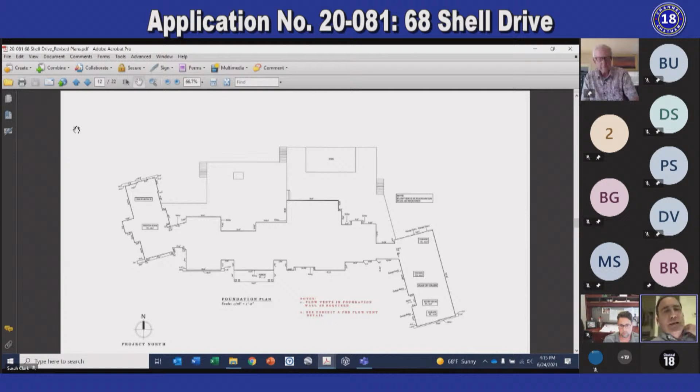So from a straight planning standpoint, and my background is both in architecture and urban design, I really looked at this a little bit like an urban design project. It's really built around two courtyards, the south courtyard and the north courtyard. What I tried to do is stretch the program of the house out east to west, so that most rooms will have 2 or 3 exposures. There's a lot of talk lately about LEED design and green design, but back when I started in architecture in the 80s, we used to just call it smart design - creating rooms that have good circulation, adequate overhangs for summer shading, and also light penetration throughout the house.

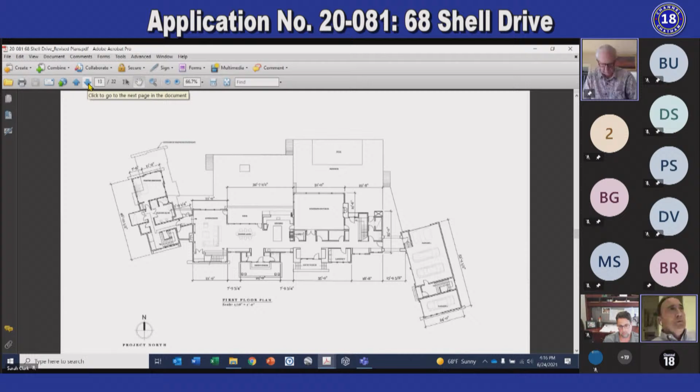So the design cues for the project actually came from the site itself, as well as the history of Chatham and the history of New England architecture. Rather than creating what I would simply call an estate home, the idea was to think about this house much in the way that we see New England houses are built. New England houses, as you know, are built - you have the big house, which is the primary homestead, and it grows over time. You may have heard of the book called Big House, Little House, Back House, Barn, about how buildings grow over time to accommodate the family.

So in a lot of ways, we've spread this house out, made it look like it had been built over time, looking to the houses of Chatham and the existing houses, house and barns that were there, using similar pitched roofs, the ideas of what's called saddlebags, which are side rooms off of the main form.

But I think one of the things that makes this house really play into a lot of what we see in Chatham is that the house really isn't 2 stories - it's really a story and a half. What I mean by that is we're tucking that second level into the roof, so you don't have a full height wall on the exterior generally. Light, air, and mass is gained by building out dormers that pop up, or incorporating space into the gable ends of the building.

With that, I just wanted to say there are certain other challenges we have, because of course we have to provide flood vents in accordance with all state and local regulations. So it was important that we had all the mechanicals above that floodplain - obviously that precludes any basement. The idea of tucking those rooms in, we're actually below the necessary 30-foot height by a few inches.

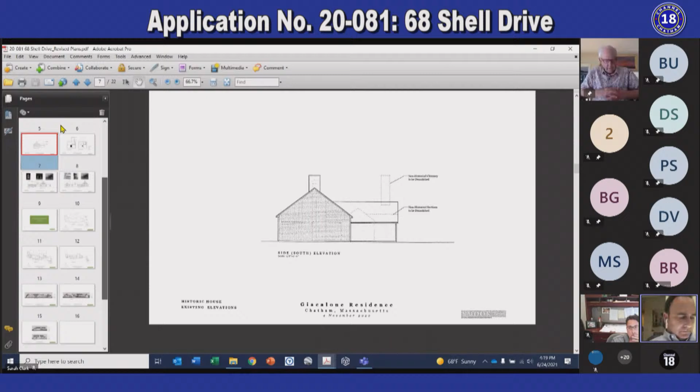Okay, Mr. Riley? Mr. Riley? I think Mr. Riley has disappeared. I'm here. Oh, good. All right. Yeah, you're lucky, I can't get my camera to turn on, but I do have the microphone.

Dave Clark is also in the meeting if you have any questions regarding the engineering. I guess the points that Clay has made are legitimate.

I think it's important to understand the neighborhood where this house is being built. As you know, and justly so, the board is concerned with the visual impact changing structures would have on the neighborhood. So I want to point out a couple of things.

When you're driving down Shell Drive to get to the property, because of the mature trees on the property and on adjacent properties, the only portion of the existing structure that's visible is the main section of the antique house. I don't know if any of you were there today or recently, but I certainly observed that.

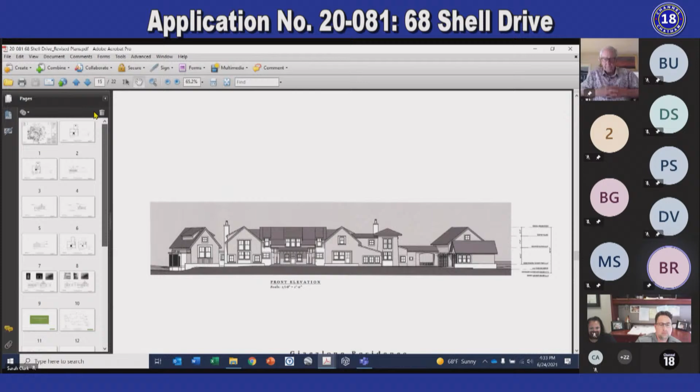If you look at the site plan, the current elevation is 10, and it's going to go up over 11, up to 11. And then Blue Flags Design did a plan that's going to put substantial plantings along that—not trees, because we don't want to block the view either way, but there will be planting. So in terms of the real visual from the water, it will be less than is currently shown.

There. Compatibility of the proposed use: it's a single-family house, and all the other rather large homes in the neighborhood are single-family homes. We are putting in a new septic system, which would be an improvement over the existing system.

And Dave Clark can address that if you want questions about that. We actually believe there'll be an improvement of traffic flow and safety, because with the driveway above the flood elevation, if there is a flood, both the owners of the property and any emergency vehicles would be able to continue to access the property despite the flood waters.

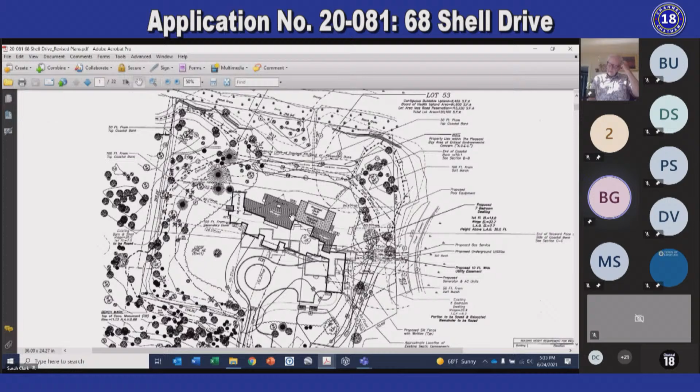Dave Clark. I am here. Go ahead, Dave. So the buildable upland, this is an unusual situation, the house is not even in the buildable upland. There's two sections of buildable upland: one towards the water to the left, and another section to the right, along the right property line. Because those two areas are not contiguous, we only counted the left side as the buildable upland of the lot, being 8,000 square feet. So the existing house, the proposed house, the location of the relocated portion of the saved home, none of those are within the buildable upland. Correct. Okay.

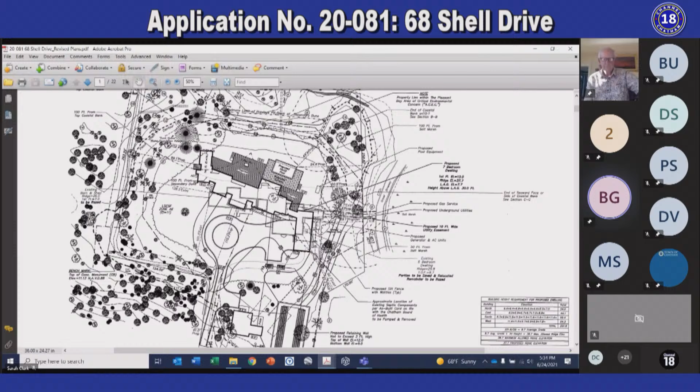Yeah, I also had the same concern that Dennis brought up and Paul about the driveway. I think we've pretty much discussed that, but have you perked that septic area next to where the building is being relocated, just out of curiosity? Have not yet. No, but there was a septic upgrade done there in the last 20 years, and I looked at those soil test results, and there's adequate soils. We will be required to do additional test holes when the time comes to permit the septic system. That was more of curiosity. That's all I had for now, Dave. Thanks. Okay.

Okay, so now we'll go through and list for Mr. Riley or anybody the concerns you might or might not have with this project. Let's start with Dave Veach again. So it's a very different question than what we had before. Yes, it is.

I'm very much in favor of saving the old portion of the house, and we've gotten a lot of feedback on that, and I agree with all of those writers. However, I have a number of concerns with this proposal. I've had some time to look around at things, knowing no decision we make sets a precedent, et cetera, but just looking at things we've approved or not approved in the Conservancy District, I honestly can't find anything that's asking as much of us zoning-wise as this proposal. It really stands out.

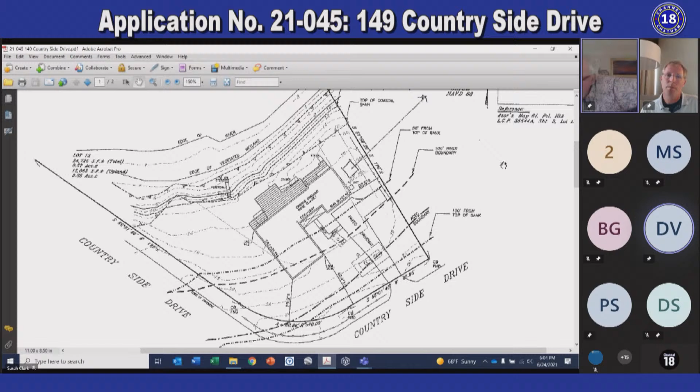So this requires a variance because it's being suggested to be placed in the conservancy. I'm not sure — I know we're seeking a variance, but I'm not clear why. Well, it's within the 50-foot setback of the Coastal Conservancy District. Yes, so it's a new nonconformity, and that's what's going on. Okay, all right, thanks. I don't have any other questions.

So we do meet the building requirements for setbacks. We have to be 9 feet from the property line. So as far as the building permit, I think we're okay. Okay, Paul, do you have any questions? No, I have no questions.

Okay, I don't either. So a motion, please, Paul. Yes, this is Paul Semple. I'll move to close the hearing and move into deliberations.

Dave Veach seconds. Okay, we need to vote on that. Dave Veach votes yes. Paul Semple votes yes. Dave Thompson, yes. Dennis Sullivan votes yes. And I vote yes.

Okay, deliberations, let's start with Megan. I do not have too much to say, except that I think that having to not park in your garage is kind of a hardship. I am not voting on this, but if I were, I would vote yes.

Bill? Yeah, you can see that the options are clearly limited, and while I know it is inside of the Coastal Conservancy setback area, putting it anywhere else outside of it on this property I wouldn't do. So I think I would be inclined to vote for it if I were voting.

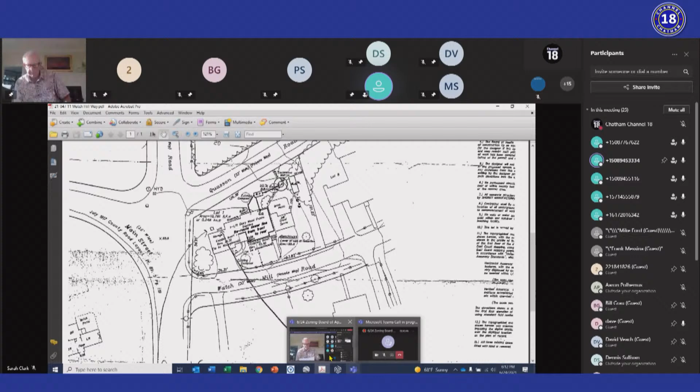The issue, as you know, is the noise mentioned in the letter. The existing air conditioning units actually will run far more frequently than the generator. I recall a former member of the board saying that with generator requests, if you've got generators, you've got problems more than noise, if the generator is necessary. So the issue is whether installation of one additional exterior mechanical appliance system, a generator, would be substantially more detrimental to the neighborhood. I think in this case you can find that it will not be at all detrimental, given its location and proximity to the existing compressors in a location which is both fenced and shielded. Happy to answer any questions.

Okay, thank you very much. Is there anyone in the audience who would like to speak in favor of this application? If so, please indicate on the screen now so Sarah can recognize you. I don't see anyone that wishes to speak in favor of this application. I'll read the correspondence, which consists of a statement from Nicole Smith, our conservation agent. She writes, 'No conservation approval needed.' End of correspondence. Is there anyone in the audience who would like to speak either against this or has a specific question? If so, please indicate on the screen now so Sarah can recognize you.

I see no one who wishes to speak in opposition or has a specific question. I'll generally ask the board members, does anybody have a question? If so, speak up. Well, I think the silence speaks for itself.

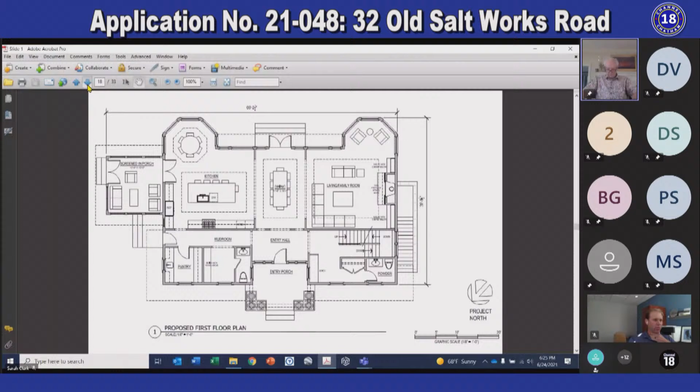And then next slide, we do have a floor plan, as you can see. First floor, and then the next slide will be the second floor. Thank you, and then keep rolling from there, please, Sarah. Just the basement. And then we do have a garage right here. Go to the next slide.

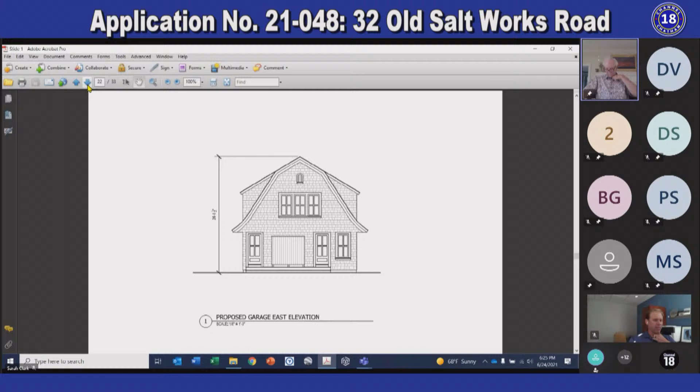And the next slide. So this garage does have a bit of finished space over top of it, but rather a compact 2-car garage with some finished space over top. And then you can see a little changing area on the side, on the floor plan on the first floor, and then this is the second floor space of the garage.

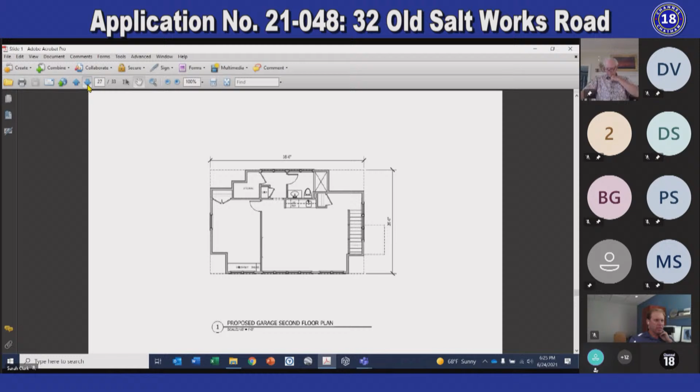And then we just did a rendering. The renderings, I think, help a lot rather than just looking at the 2D elevation. So we rendered the design for you all, so you can see it. This is on the driveway side, so not visible, but wanted to share with you what the structure will really look like.

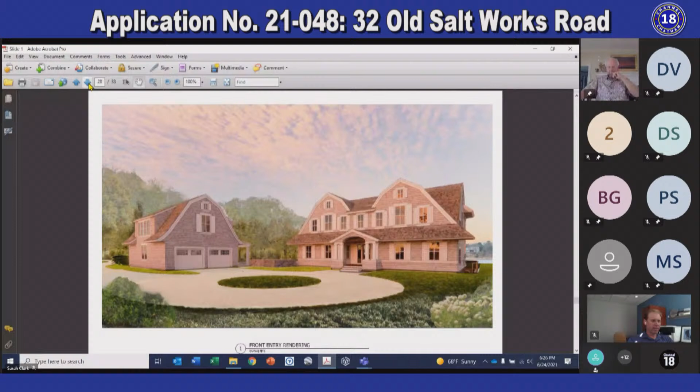And then next slide, just the existing floor plan, and then back to the site plan. Oh, you can go back, Sarah. You just had these, if there are any. Thank you, you can go back to the site plan if you would please. We can just leave it there. Yeah, that would be great, Mr. Ford.

Excellent, and happy to answer any questions along the way as well. Thank you, Mr. Ford. Mr. Chairman, why don't I run through the criteria? Please do. So, adequacy of size of the site.

As I indicated, the site is over 44,000 square feet, 44,899. The buildable area is over 40,000 square feet, 40,944. So it is a conforming lot from an area standpoint, non-conforming in that it has simply 60 feet of frontage.

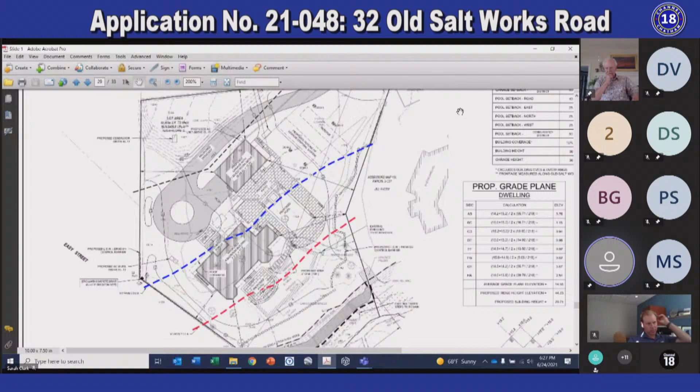The proposed dwelling will now be located out of the Conservancy District. It meets all setbacks—side, rear, all abutter, obviously front yard—as does the accessory structure, which has the changing area for the pool as well as a garage and a room above. The two structures have a total building coverage of 3,300 square feet, which is 8% of the lot. 10% is allowed under the zoning bylaw. So I think you can make a finding that the site is adequate for the proposed project.

Compatibility, the size of the proposed structure with neighboring properties. I think as Aaron took you along the water, which is where this is visible from, as opposed to Old Salt Works Road, where it's not visible, as it's in the lot. It will be compatible. It will be a little smaller than some of those houses along the water. Some of them are quite large, but we think it fits in fairly nicely and is under the lot coverage requirements, and as I said, meets all dimensional requirements of the bylaw.

Extent of the proposed increase in non-conforming nature: we eliminate all of the nonconformities of the present structure. I should mention, there is one other nonconformity on the site, Mr. Chairman. It's down near the beach, on the right-hand side of the lot. It's an old pillbox, a concrete structure. It is a remnant of the Naval Air Station that was there. This area of the property actually had a large blimp hangar on it, and that pillbox was accessory to that.

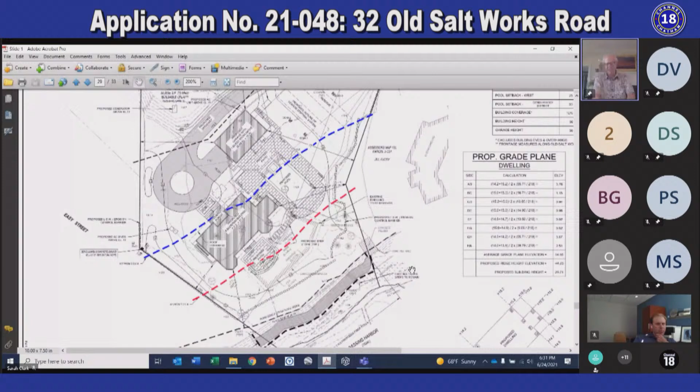Is there anyone in the audience who would like to speak in favor of this application? If so, please indicate on the screen now so that Sarah can recognize you. I do not see anyone that wishes to speak in favor of this application.

Okay, then I'll read the correspondence first. This is from Nicole Smith, conservation agent. She writes: 32 Old Salt Works was heard at yesterday's meeting and many questions were answered. We are waiting for land management documents, but I believe the project as presented will be approved with conditions, and any changes would not be zoning related.

Then we have a memo from Judith Giorgio, Board of Health. She writes on 6/21: I've reviewed the plan for construction of a new dwelling. The proposed dwelling will add sewage flow to the existing property above what is allowed by the Board of Health nitrogen loading regulation. This will require approval by the Board of Health for the installation of an alternate septic system in order to construct a 4-bedroom dwelling and a 1-bedroom guest house.

Then we have a note from John Avery, whose address is 34 Old Salt Works. On June 21 he writes: thank you for sending us notice of the public hearing. As owners of the property at 34 Old Salt Works Road, we are writing to express our support of a special permit being issued to enable them to move forward with construction of their new home. We have reviewed the plans of the proposed home and believe it will fit nicely in our neighborhood while preserving the integrity of the shore front. We hope the Zoning Board of Appeals will approve the requested special permit.

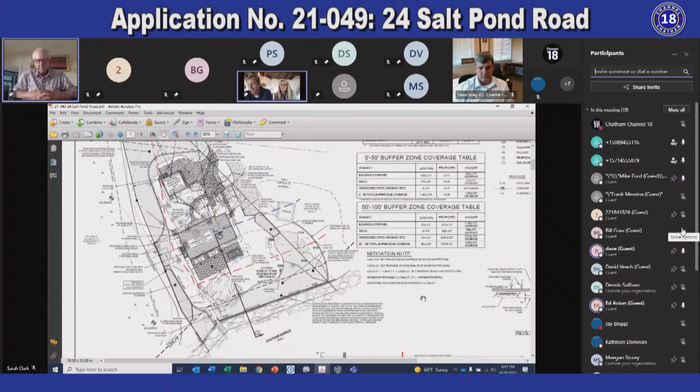I'll be brief. We were aided by many knowledgeable professionals during the process, some of which are here tonight to answer questions, as well as the helpful and patient people in the community development offices in town. Our existing home has 4 small bedrooms. I believe it's charming, but the foundation's crumbling. It's not winterized, and currently we're only about 8 feet from Chatham Harbor. Chatham is our home. It'll continue to be our home. It's our primary home, and therefore we'd like to build a new year-round family home on the property.

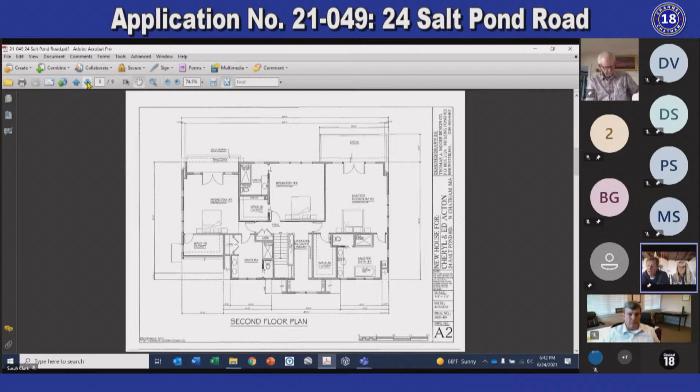Our proposed home is a 4-bedroom, 2-story gambrel with a detached garage with some living space over the garage. Cheryl and I, mainly Cheryl, worked with the local architect, Tom Moore, who's done quite a bit of work in Chatham. The concept is a classic New England Chatham gambrel, conscious of the material, scale, and fit with the neighborhood. It's going to have a red cedar roof, white cedar shingle siding that will both weather to gray, proper shutters with pins and holdbacks, stone veneer on the foundation, window boxes, true divided light windows, much like a cottage style house. It'll have a footprint of just slightly over 2,000 square feet, I think 2016.

It's, we believe, very much in the character and scale of this neighborhood and what you would generally see in Chatham. And I believe once the house weathers, it really should appear like a classic Chatham house.

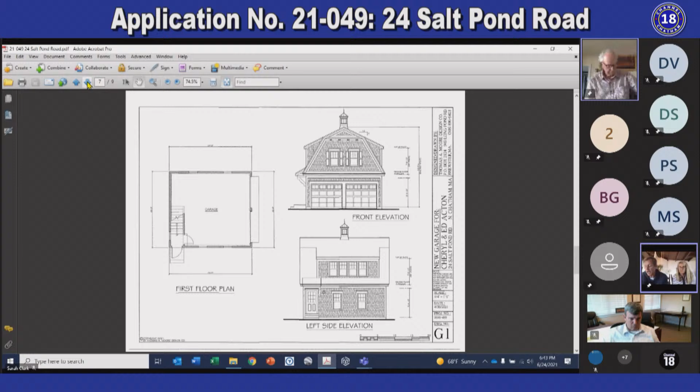And I guess lastly, before Mike runs through the criteria, we want to let you know that we engaged our neighbors early on in the project, and they've been very helpful and very supportive of the project. And I guess with that, I'll let Mike take over.

The lot has a series of development limitations, all of which we believe we've addressed. First, the house was old enough so that we needed to go to the Historic Commission and seek permission to demolish it. We worked with the Historic Commission, and they asked the Actons to place a 6-month delay on it to see if there wasn't somebody interested in taking it. Given where it is, and if you've been out to the site, logistically trying to get in there...

The only way somebody could really come and move this is if they came in from the harbor and on a barge, maybe we'd be able to move the structure to another location. The Actons agreed to a 6-month delay. There were a number of people who were interested and came and looked, but frankly, it was a tall order to try and move this house off of this lot, and so there were no takers. But we've satisfied Historic after working with them.

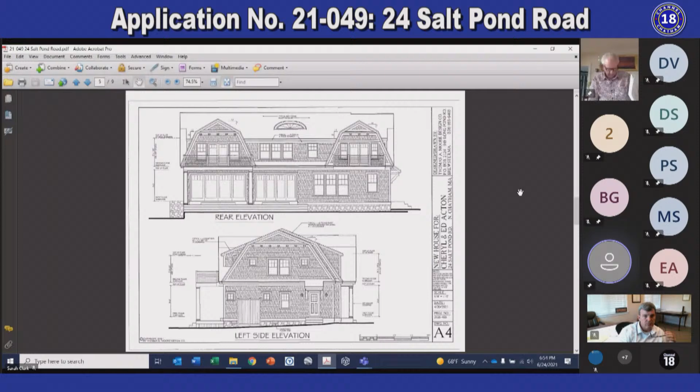The utilities are fine, there's no formula business, obviously. With respect to the floodplain, and that's why I asked Sean Riley to be on, in terms of the lateral condition, we're moving it laterally out of the V zone and out of the area of the AE zone, but it still remains in the AE zone. It's a little larger house, but unlike the existing house, which is in the V zone, this new house will have flood vents, and the water will be able to flow. It will meet in all respects the floodplain requirements, where the existing house does not. Mr. Riley is on the phone if the board needs further discussion with respect to any lateral expansion, of which there is some in the AE zone, and an elimination of that exists in the V zone.

So those are our findings, Mr. Chairman. Okay, thank you very much.

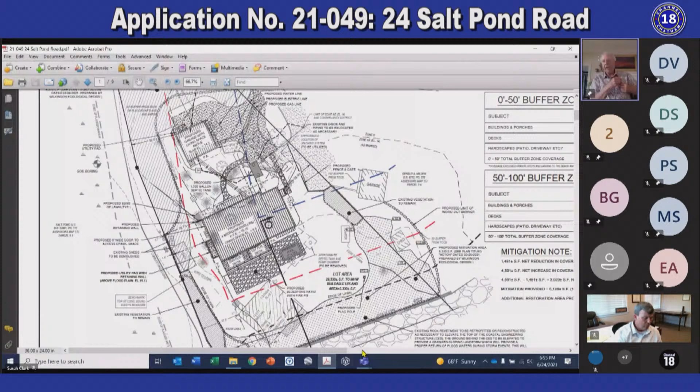Is there anyone in the audience who would like to speak in favor of this application? If so, please indicate on the screen now so that Sarah can recognize you. I see no one that wishes to speak in favor of this application.

Okay, so I'll read the correspondence. First, this is from Nicole Smith, conservation agent for the town. 24 Salt Pond, like I mentioned, was continued to July 14th, but the only issues the Conservation Commission had were in regard to land management. At the April 19th meeting, the commission stated that they believe the project could be permitted with conditions, pending the additional information that they had requested.

Then Judith Giorgio writes on 6/22: I have reviewed the plan for construction of the new dwelling. The proposed dwelling will not add sewage flow to the existing property. I have discussed with the homeowner a deed restriction at the property, restricting the property to 4 bedrooms. The room over the garage will be limited to a game/bonus room only. The shower will be removed and will not be used or considered as a legal bedroom. I will require the deed restriction prior to signing off on the building permit.